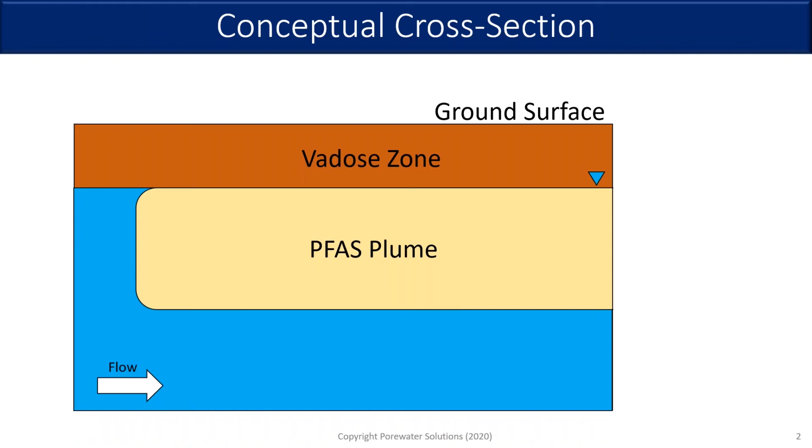I'm assuming that most people online today are very familiar with the widespread problem we have with PFAS contamination in groundwater and the real challenges we have with in-situ remediation of these PFAS plumes.

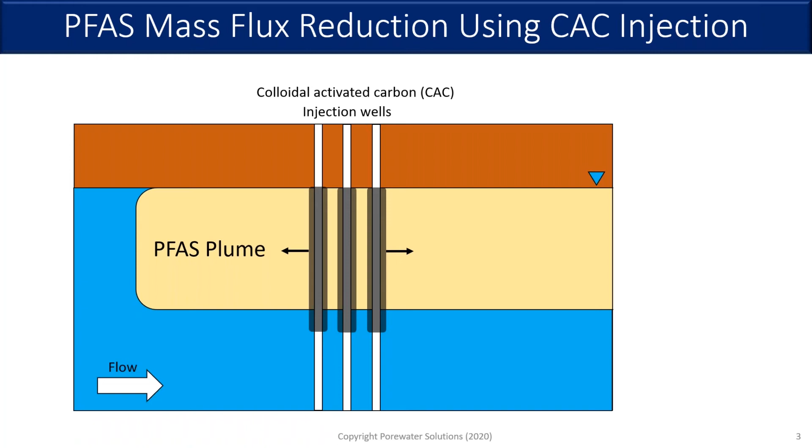One option that's gained a lot of interest these days is injecting colloidal activated carbon. These are small particles of activated carbon. Regenesis sells this as PlumeStop. We can inject this PlumeStop or CAC into aquifers through temporary injection wells, right in the PFAS plume. Over time, these little particles of activated carbon will move some distance away from the wells, not a lot of distance, but some, where they'll attach to sand and gravel grains in the porous media, and stay there. And the PFAS plume, as it moves through the CAC zone, will adsorb very strongly to the colloidal activated carbon.

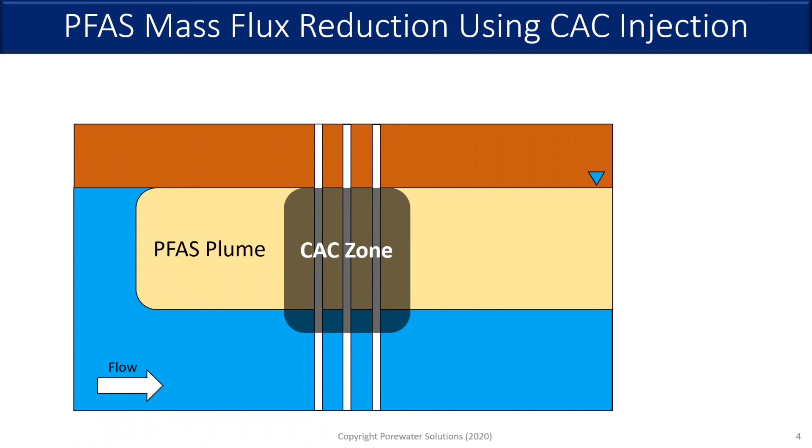So there's a real benefit for reducing mass flux from these plumes using activated carbon with solutions like PlumeStop.

Today I'm going to talk first quite briefly about some basic PFAS concepts and colloidal activated carbon concepts. Then I'm going to review a PFAS case study done at a site in Canada by Rick McGregor at In-Situ Remediation Services Limited. This is a site where PlumeStop, colloidal activated carbon, was injected into the aquifer. Very quickly, we saw that the PFAS constituents were reduced to below detection limits within a matter of months, and they've been below detection limits now for 4 years and counting. This is a site where PFOS and PFOA had maximum concentrations of up to 1 to 3 parts per billion, microgram per liter.

So one question we've had is, how long will colloidal activated carbon work at sites where we've got higher PFOS and PFOA concentrations, more in the 10 plus microgram per liter range, like we see at AFFF sites? To help with that, I'm going to walk through an example groundwater plume for PFAS constituents at an AFFF site to show typical concentrations.

We've also partnered with the University of Waterloo. Dr. Anh Pham has developed adsorption isotherms which allow us to quantify how much PFAS will adsorb to the colloidal activated carbon. We're using those adsorption isotherms to model the sensitivity of the longevity of this remedy to things like lower or higher concentrations, or lower or higher velocity. What are the site characteristics that really affect the longevity of a remedy like PlumeStop at PFAS sites?

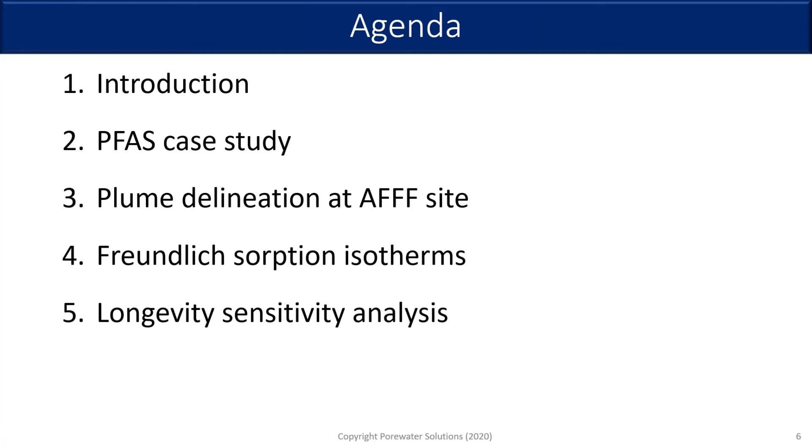So for the introduction, I'm assuming that most people here have a general understanding of PFAS. So I'm going to do us all a favor and not mention all these really long, complicated chemical names, just to shorten this presentation up.

And that's why molecules like PFAS are very difficult to degrade. They were engineered to be robust, which means they're very persistent in the environment, which is one of the challenges we have with in-situ remediation.

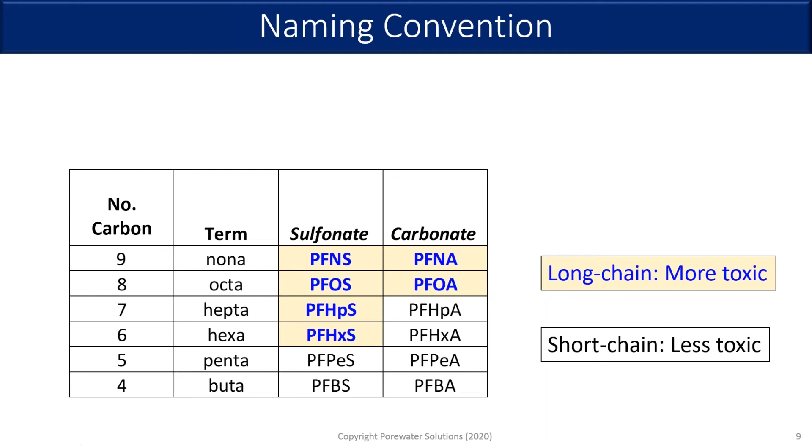If you want more information on PFAS, I'd strongly recommend you check out the new ITRC PFAS guidance manual. It's a web-based document, and you can see the website listed here. I've been on the ITRC team for about 3 years now. One thing I contributed, which I'm quite proud of, is the use of radial diagrams. This presentation isn't about radial diagrams, but if you're interested, these are very helpful because there are so many PFAS constituents we need to evaluate trends for, upgradient and downgradient along groundwater flow paths, and to see whether biodegradation is occurring.

So if you're interested, there's a tool on our website called Visual Bio. It's a free tool to download. It's a little bit cumbersome. We are coming up with a Windows version for next year, but in case you're interested, that's something you may want to check out.

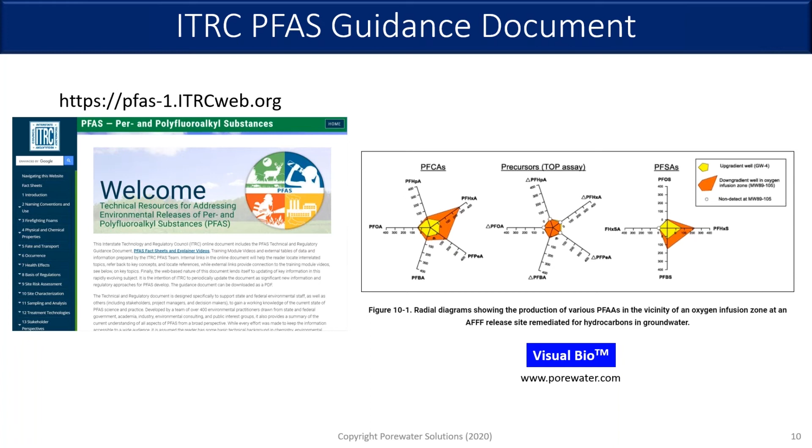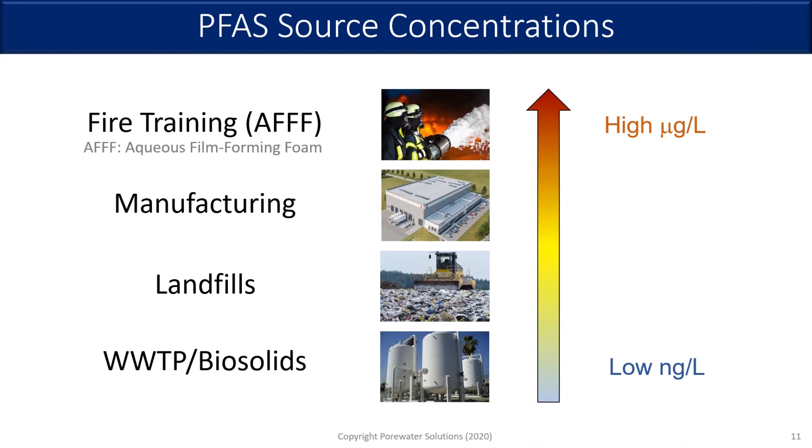With PFAS, there are different types of sites. Some sites like landfills and wastewater treatment plants have fairly low concentrations of PFAS constituents in plumes, more in the nanogram per liter range. Other sites, especially fire training sites where aqueous film forming foams were used historically, can have higher concentrations of PFAS in groundwater, in the tens to hundreds of microgram per liter range. The range of concentrations matters because the lower the concentration in a groundwater plume, the longer a colloidal activated carbon remedy will work with a PFAS plume. So at some sites, especially lower concentration plumes, longevity is fairly high. Even for higher concentration plumes, we can engineer these remedies to have higher longevity, which we'll discuss with modeling a little later.

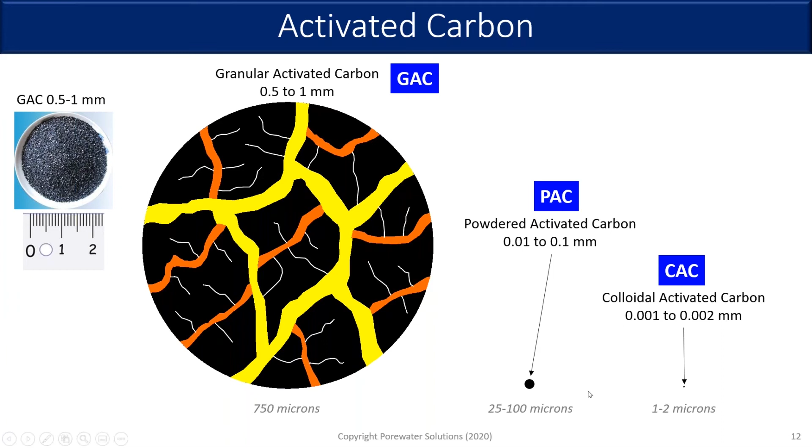They can go into finer sands quite easily, even at low pressures, so we don't have to fracture soils to get the colloidal-sized particles into the aquifer. This means we don't get preferential distribution, and they're more uniformly distributed because of their small size, which is a real advantage.

Another advantage, in addition to the small size, is that absorption strength actually increases as you decrease the size of these activated carbon particles. The yellow symbols here are from a groundbreaking paper by Xiao et al., and Dr. Chris Higgins was a co-author on this paper. They looked at how, as the activated carbon particle size decreases from left to right on this chart, the absorption strength actually increases. Based on sample data I'd received from Regenesis a few years ago, I plotted an effective KD here for colloidal activated carbon, showing it has even higher absorption strength per gram of carbon than powdered activated carbon.

So that's a second advantage. It's quite different from granular activated carbon for that reason.

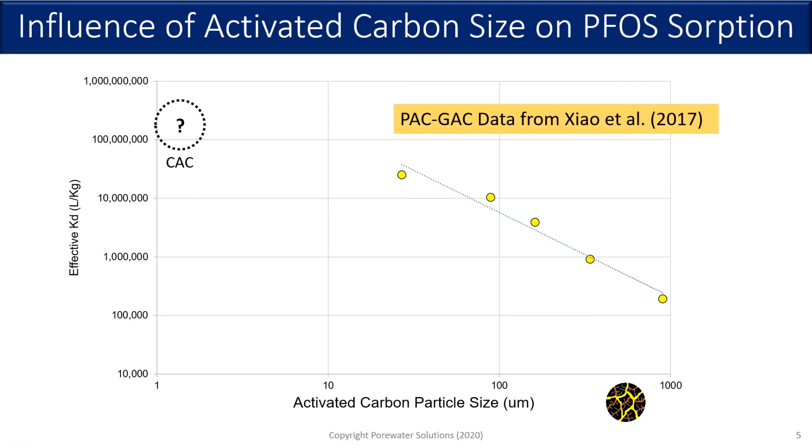In terms of applications, the photograph on the left, provided by Rick McGregor of In-Situ Remediation Services, shows what a PlumeStop slurry looks like before it's injected into the ground. It has these small, tiny particles of activated carbon, plus a polymer that helps improve distribution so it's more uniform, and the activated carbon particles don't conglomerate together. A typical radius of influence might be something like 10 feet, which is what the site in the case study I'll discuss measured.

The picture on the right is really effective for visualizing how these activated carbon particles get distributed after injection. This photograph was provided by Regenesis. You can see the large particle is one sand grain, and these small particles on the surface attached to it are the colloidal activated carbon particles, about 1 to 2 microns in size.

After injection, like any colloid—whether it's zero valent iron or emulsified oil—these particles move a little away from the injection well and eventually attach to the sand grains in the aquifer. Activated carbon is the same way, so that's what it looks like: small particles of activated carbon attached to the sand.

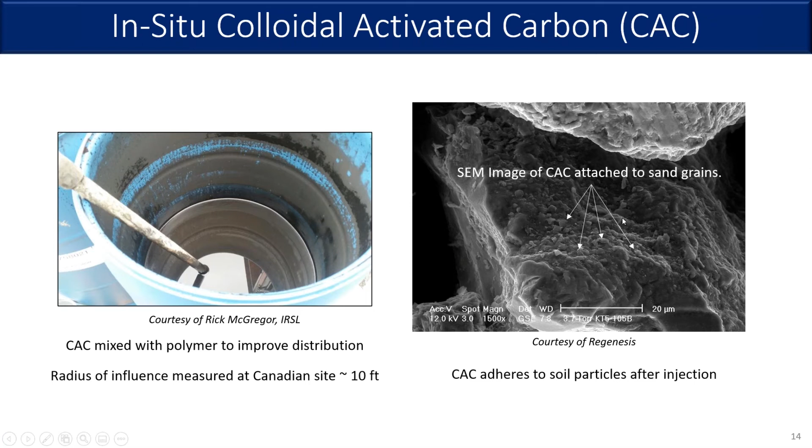Then, as PFAS or other contaminants move with groundwater flow through the porous media, they basically absorb to these carbon particles very effectively.

In terms of what a retardation coefficient looks like with activated carbon, this is a conceptual plot. Let's say we've got a groundwater plume with PFAS at maybe 10 micrograms per liter—that might fall somewhere here on the chart, before the carbon's injected. After carbon's injected, the PFAS concentration goes down substantially, usually below detection limits, so it might be here on the plot. At these really low concentrations, we've got very high retardation coefficients.

Over time, as the plume continues to move through that CAC zone, more mass comes through and the absorption sites get filled up more over time. So groundwater concentration increases a little, and the retardation coefficient declines. Eventually those absorption sites will get saturated and concentrations will return to the original groundwater levels. We'll talk a little later about things we can do to account for that with remediation at sites.

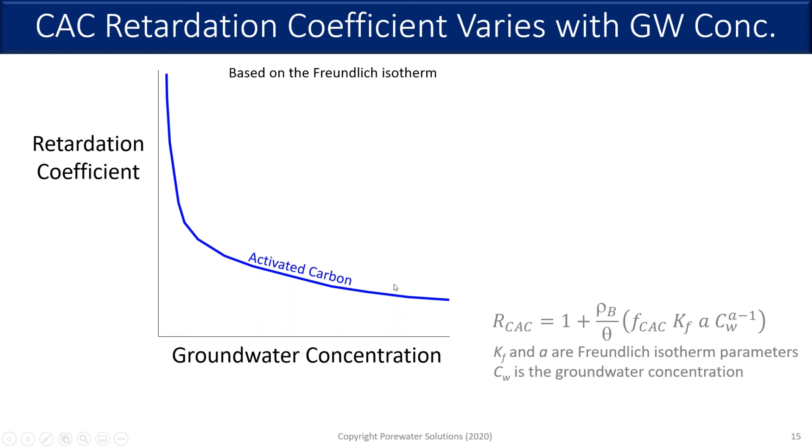Next, let's turn to a case study—I think the first site I've ever seen where PFAS were actually treated in situ. This is a site Rick McGregor worked on, actually in Canada. Rick gave a seminar for Regenesis about the site about two months ago and called it the accidental site, because it really was a petroleum hydrocarbon site. He had heard before remediation that they might have had fire training in a small area at this site, so he did an investigation and sampled for PFOS and PFOA. Sure enough, he found low-level concentrations, 1 to 3 micrograms per liter PFOS and PFOA at this site. You can see generally the source area is where that black line is delineated.

As part of this site, he injected PlumeStop, and he also injected substrate to enhance aerobic degradation of the petroleum hydrocarbons. Sure enough, the PlumeStop, the colloidal activated carbon, also completely attenuated the PFAS at this site.

So after the injection, when he went back 3 or 6 months later to do the first round of monitoring, the PFOS and PFOA were non-detect everywhere. So it was clearly quite effective for also attenuating the PFAS.

About 3 years ago, I worked with Rick. I got the data from Rick for this site and developed a model so we could simulate what happens when the CAC, the colloidal activated carbon, was injected. Around that source area, and also where there was co-located petroleum hydrocarbons, Rick had done injection of PlumeStop, colloidal activated carbon, basically around this blue area. That's the outer perimeter of where the temporary injection wells were.

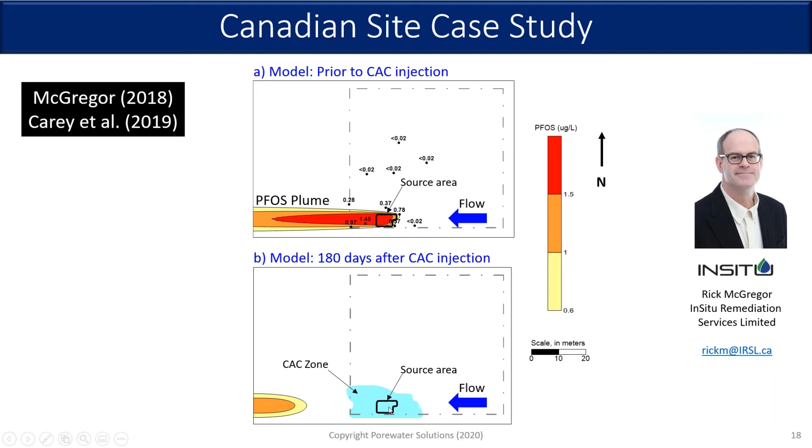So what happens is we're seeing model results here that show that 6 months after that injection, I've got a model that simulates how the PFAS basically absorbs to that carbon after it's attached to the sand grains in the aquifer. This shows 6 months after we've got plume detachment, where the source in this area is still turned on in the model, but the model shows that with the carbon injected, it's basically preferentially absorbing that PFAS and preventing it from moving down gradient. And that's where we see that plume detachment occurring.

So just using radial diagrams, just to show not just PFOS and PFOA, within about 18 months, Rick was measuring all the PFAS constituents you typically get in labs, 20 to 30 constituents. This just shows some of the sulfonates and one precursor that were measured. The white symbols here mean non-detects.

So in 2017, which is this blue data series, we had low concentrations at all the wells. There was one well that had one minor detection of PFOS at about 30 or 40 nanogram per liter. With multiple events after this one, it was never detected again. So the thinking is this may have just been cross-contamination in the field or from the lab. You can see the original pre-injection concentration for PFOS at this well was 1,000 nanogram per liter.

After the injection, it had dropped by 1.5 orders of magnitude. Looking at all the other wells in the CAC zone, we see the same thing, drops of 1.5 to 2 orders of magnitude. For PFOS, we only had PFOS before the injection, but after the injection, we didn't see any of the other constituents. 4 years in now with monitoring at the site over 4 years, we're still at non-detect levels. So clearly at the lower concentrations, PlumeStop works well because it's absorbing these PFAS and preventing it from moving down gradient.

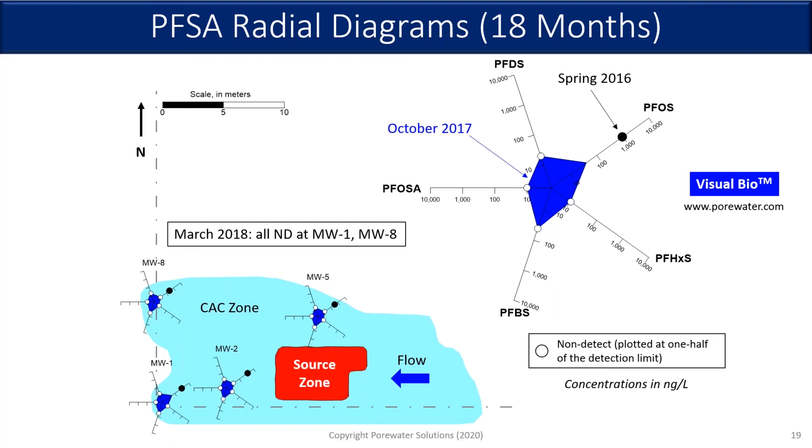Just to show what it looks like longer term, I had published a paper with Rick and other co-authors in the Remediation Journal last year. So if anybody's interested, just send me a quick email, I'm happy to send that paper to you. In that paper, I looked at simulating a longer term, using absorption parameters that were developed by Dr. Anh Pham and Seyfollah Hakimabadi.

They both worked hard in the lab to develop these isotherms that allow us to quantify longevity in the longer term. You can see in the first year, we're not seeing PFAS, it's below detection limits. After 10 years in the source area, we do have PFAS at about 0.1 microgram per liter because that source is still on in the model. I'm assuming it's back diffusion or some kind of source that's continuing the flux. So over time, those colloidal activated carbons do start - the absorption sites get filled up, the concentrations increase. It's another 3 or 4 decades before that plume is going to basically break through that CAC zone. So because we have a fairly long CAC zone here, we can see that these PFAS really get attenuated for a long period of time.

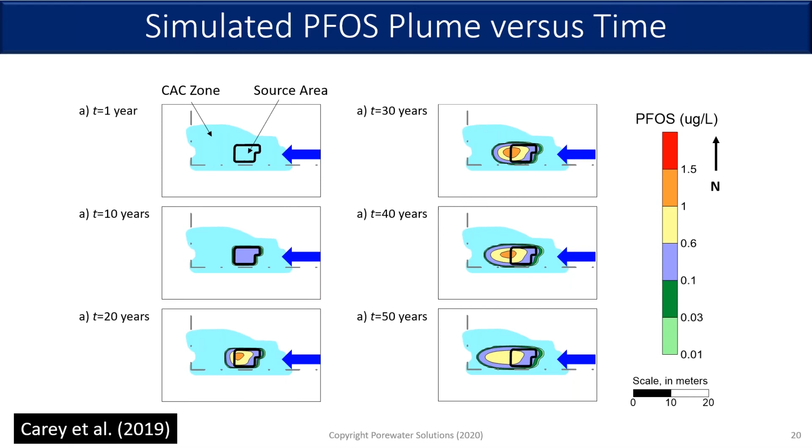So we talked about a site where PFOS and PFOA were at concentrations, maximum numbers of 1 to 3 microgram per liter, which leads to the question: how long will colloidal activated carbon or PlumeStop work at sites where PFAS are at higher concentrations, like we find at AFFF sites, where concentrations can be as high as tens to hundreds of microgram per liter?

So to help with that, I've gone into the literature. There's one site that's really well documented, and I'm going to use that as an example of a PFAS plume at an AFFF site that we'll then model a little bit later to see how longevity works with this kind of site.

So these AFFF sites, what we're really dealing with are sites with older plumes, older sources - that's the most common type of site that I've seen.

There's a great paper by Megan McGuire, who's a former grad student of Dr. Chris Higgins at Colorado School of Mines. In this paper from 2014, she went through a summary of what the groundwater plumes look like at this particular Air Force base, for data collected in 2011. She's got more information in the supporting info section and in her master's thesis.

But there's actually been more recent monitoring since, with new groundwater samples at new locations collected. So what I did is combine the data Megan collected with more recent data available online. I haven't worked on this site - these are just publicly available data that I've looked at. Putting it all together, this is what the PFAS plume looks like.

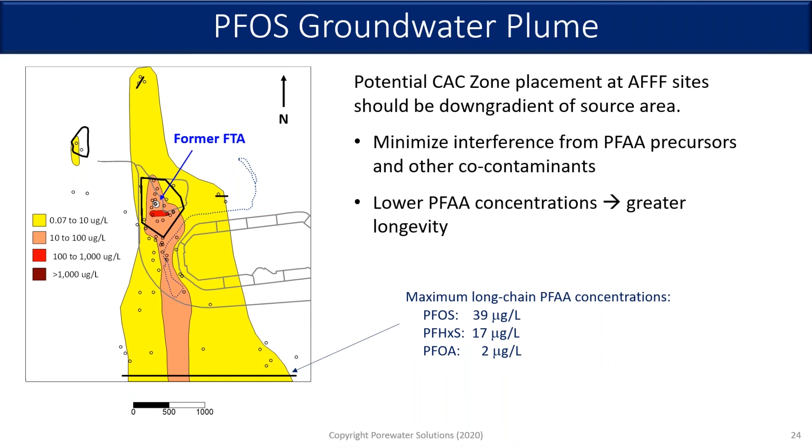One other thing to consider is that if you can decrease the mass flux or concentrations in the plume with other alternatives combined with PlumeStop - for example, if you're getting a lot of mass coming from the vadose zone down to the water table, maybe for PFHxS which doesn't absorb as much as PFOS does - if you pave over that uncovered ground surface, you can reduce the flux getting into the plume, which ultimately reduces the down gradient concentrations, giving you greater longevity for your PlumeStop remedy. So that's something to consider as a combined alternative if the cost benefit warrants that.

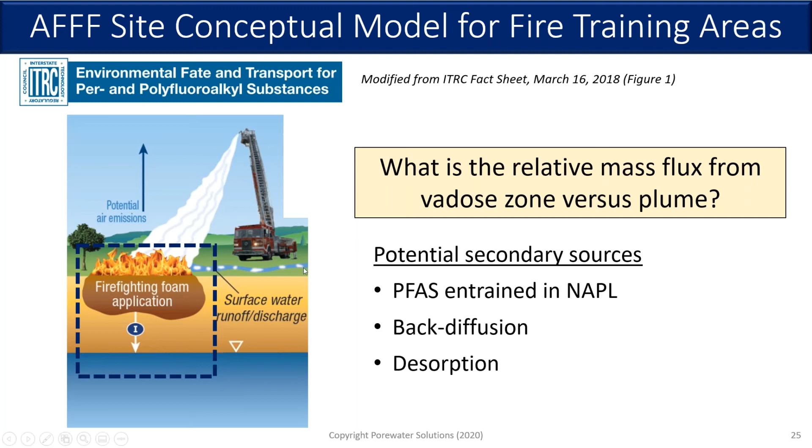Okay, so we've got the concentrations, and next we wanted to quantify what the absorption isotherms look like so we could actually model longevity. So I've worked with the University of Waterloo to do this, and to help with that, we wanted to get a groundwater sample from an AFFF site so we could get representative absorption isotherms.

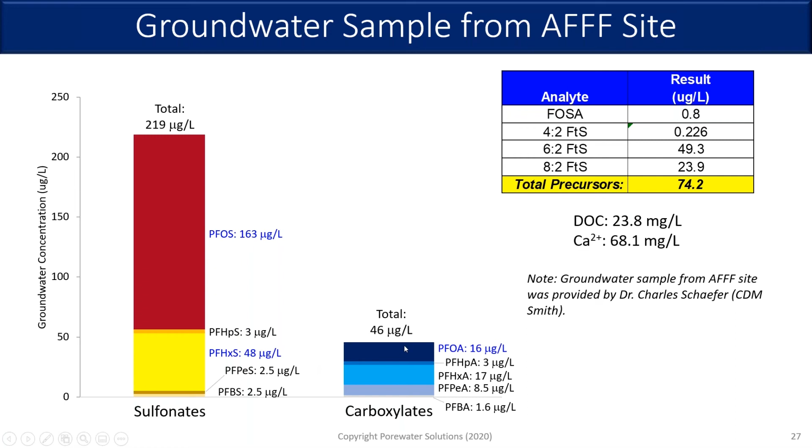Dr. Charles Schaefer provided this groundwater sample. Concentrations of this sample are actually higher than the representative plume we saw. These might be closer to a source zone. You'll see precursor concentrations are actually over 70 microgram per liter, and there's pretty high dissolved organic carbon, about 24 milligram per liter. That dissolved organic carbon and the precursors may actually interfere with absorption of our target PFAS. So these absorption isotherms may actually be conservative if we're able to go further down gradient in the plume where there's less organic carbon and less precursors.

So Dr. Anh Pham, and specifically Seyfollah Hakimabadi, a PhD candidate working with Dr. Pham, spent countless hours in the lab developing these isotherms. It's tricky working with these low concentration PFAS solutions with carbon in them. He's done a great job developing isotherms, and I've got retardation coefficients plotted here, for example, where we just have PFHXS in the water.

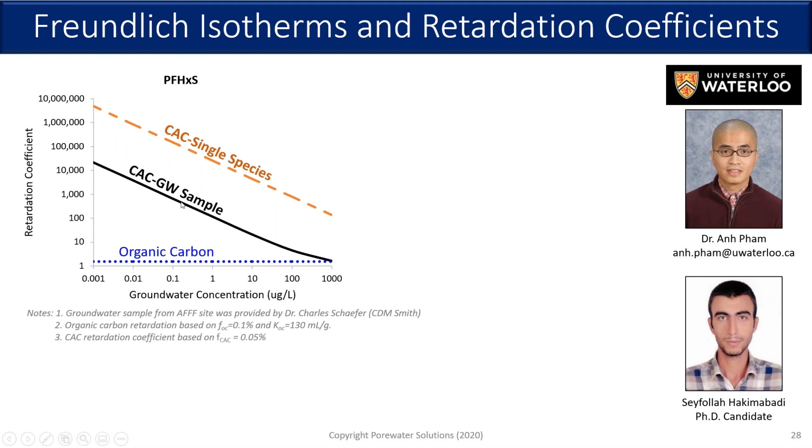That single species isotherm and retardation coefficient is about 100 times higher than what we get with a groundwater sample where we've got precursors mixed in and organic carbon. So that's showing that if you want a more representative picture of longevity, we've really got to do site-specific isotherms with groundwater samples from a site where you've got these other chemicals present, so we can look at competitive effects with these absorption isotherms.

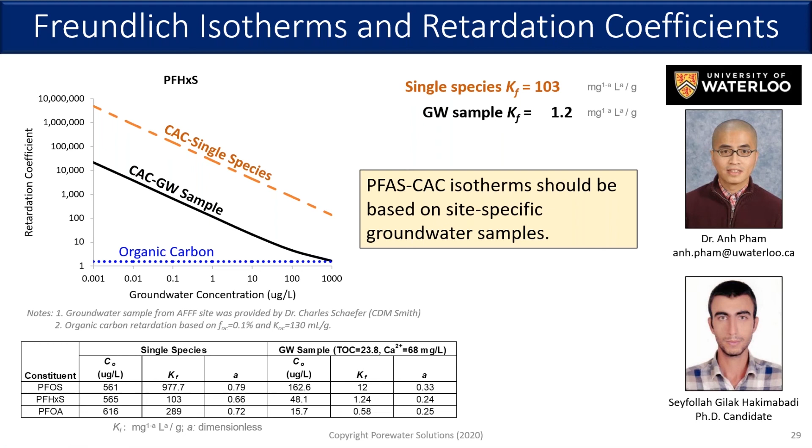So next, now that we've got the concentrations in the plume and the absorption isotherms, we've got what we need to actually model the longevity for different conditions. The base case scenario uses those plume concentrations we talked about earlier for the 3 long chain compounds most of interest at AFFF sites. I set up a simple one-dimensional model, about 1,000 feet long.

I've got a CAC zone where I simulated a fraction of colloidal activated carbon, a range of numbers here, 0.02% to 0.08%. These are numbers that Rick McGregor has measured at sites. So that gives us a measured range of what we're using in the sensitivity analysis.

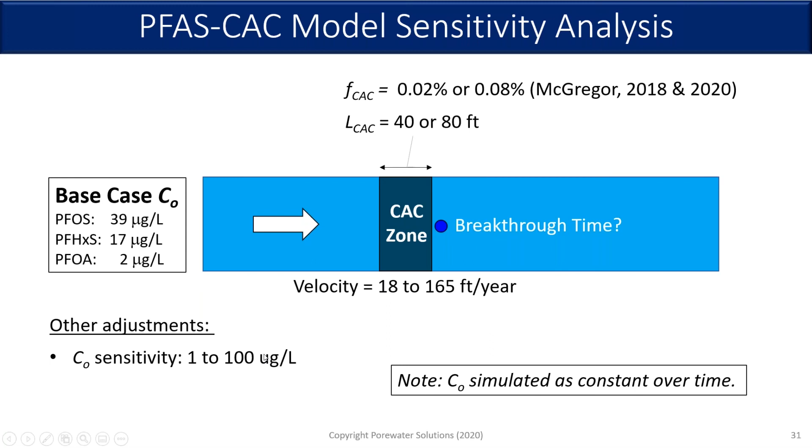I varied the length of this zone, typically 40 feet, but also modeled 80 feet to see what difference that would make in the longevity of the remedy. Velocity base case is 55 feet per year, about average for contaminated groundwater sites. The low number is that average divided by 3, and the high number is the average multiplied by 3. Then finally, I looked at a range of concentrations as well to see how those affect the longevity of the remedy.

There are some things in this transport model I've developed that allow us to do this. This is explained in that paper I talked about from last year, so if you're interested in more details, I'm happy to send you that paper.

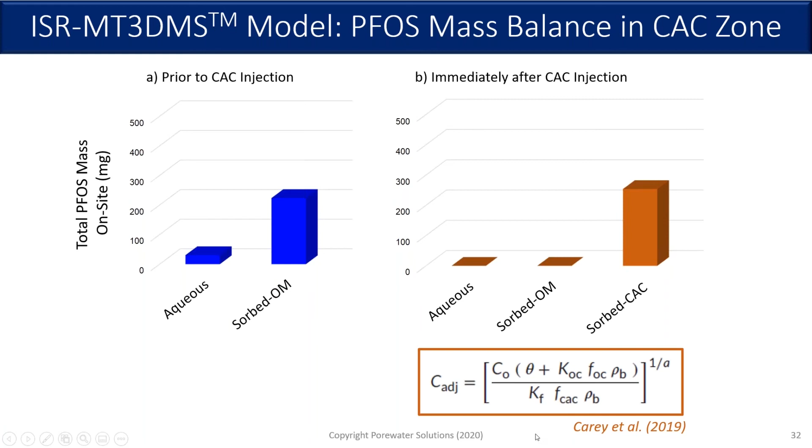I found through modeling that PFOS, even at higher concentrations, because it adsorbs more strongly to activated carbon than the other compounds, is not going to be your limiting factor for longevity. It's really the PFOA or PFHXS, depending on their plume concentrations.

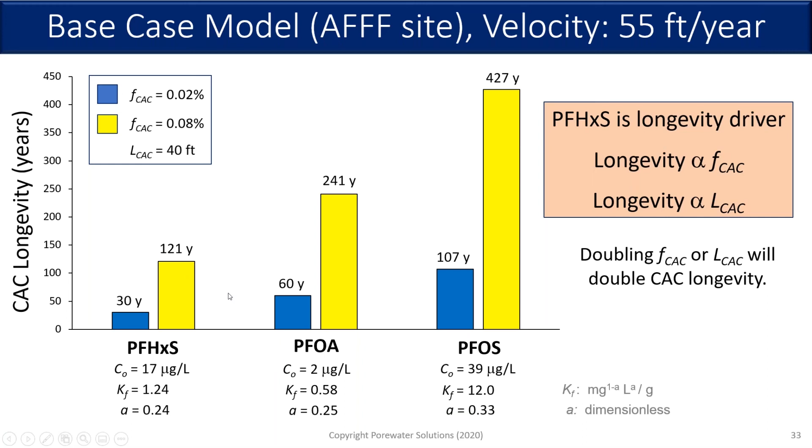In terms of velocity, it's also a fairly simple ratio. If you increase velocity by a factor of 2, you divide the longevity by a factor of 2. So they're inversely related.

So what this shows us is two things. One, if you've got sites with relatively low groundwater velocity, even with a lower fraction of colloidal activated carbon, you've still got pretty good longevity. Higher fraction of carbon, even better longevity, and velocity is less of an issue for PFAS in this particular plume we're looking at. So if you've got sites with higher velocity, you definitely want to make sure you're getting a higher fraction of colloidal activated carbon injected.

The other thing it shows us is if you have an aquifer with layers of different permeability, one layer's got a higher velocity than the other in one CAC zone, it's that higher permeability layer that's going to be limiting for your longevity if it's thick enough. If it's only 1 or 2 inches thick, and it's got low PFAS concentrations, it's really not going to be a concern for longevity. But I do recommend high resolution characterization where you're considering CAC injection.

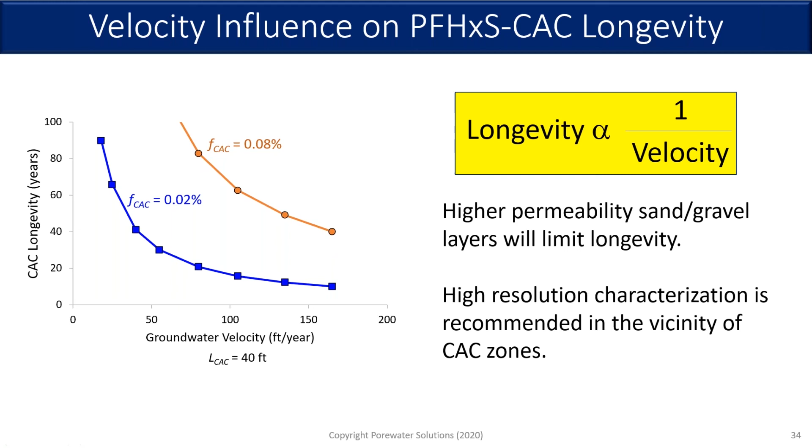I did find, though I didn't show it here, that if you increase the length of your CAC zone, say you double it, then you're doubling your longevity as well. So that's another thing we can do, even where groundwater velocity is higher for some of these compounds, if that's an issue. We can engineer the solution to try and match the conditions at your site.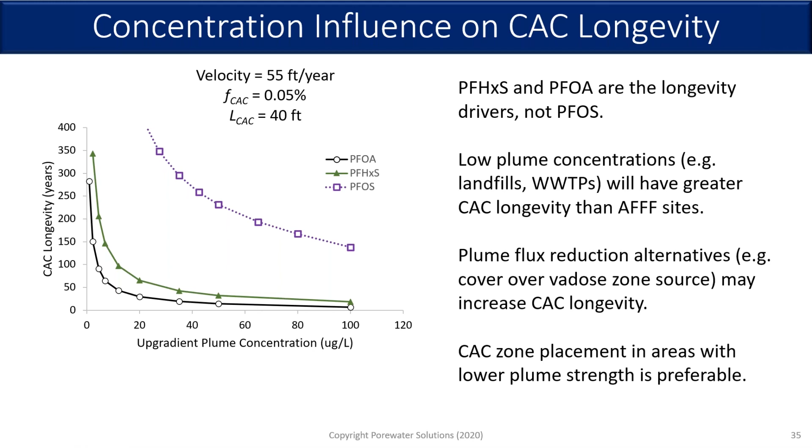With uncertainty in modeling, you have to consider where the uncertainty comes in. There are some factors we didn't include in the model that, if we had included them, would have actually increased the longevity. I won't go into the details of these, but there are factors here that make me think these isotherms are conservative. There are a couple factors that, if considered, longevity would have been decreased by some amount.

Competitive effects, we do have those in our groundwater mixture isotherms to some degree. I'm not sure what the effects are over time, I'm actually working with a couple of university teams to look at this in more detail. And then the short chain PFAS, if they are risk drivers or a regulatory concern at a site, we need to have isotherms developed to be able to predict longevity for the short chain PFAS as well.

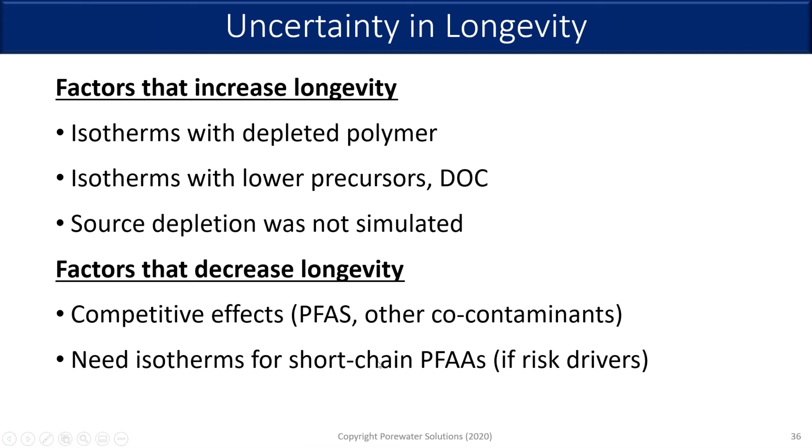So on the last slide, I just want to leave you with the fact that there are some sites where there may be a question about longevity. No question that colloidal activated carbon works. The real question is how long will it work for, and what can we do to improve longevity?

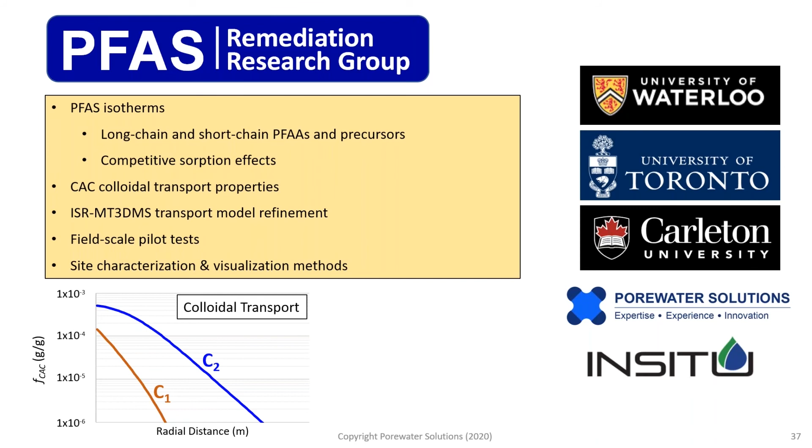Today I'm just going to supplement some information that Dr. Carey provided previously in the webinar, and go over a few things related to the colloidal activated carbon. Brief overview of the items I'm going to talk about: I'll briefly discuss the PFAS challenges we see in groundwater plumes, a bit more on PlumeStop itself, spend most of my time on considerations for using PlumeStop, and then provide an update on the Camp Grayling field case study we've been working on for the last couple of years.

So the PFAS challenges - primarily when dealing with a lot of these project sites, they're large dilute plumes that could go under multiple city municipalities, definitely multiple property owners, adjacent to multiple sensitive receptors such as surface water bodies, creeks, rivers or lakes, and even coming across into people's drinking water supply wells. For most of the projects we're looking at, we'll also have extremely low target remedial goals.

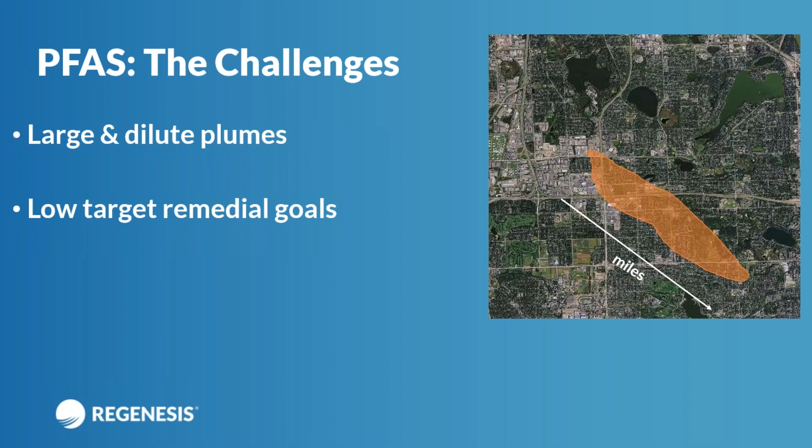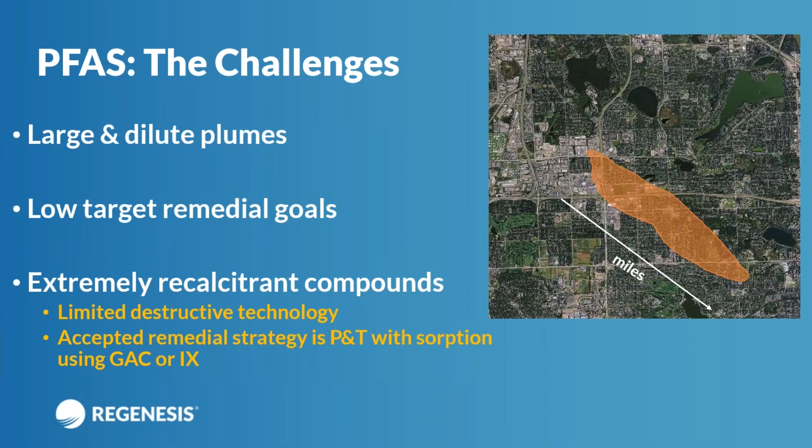Most cases are in the single digits parts per trillion, or nanograms per liter, type levels. These compounds are extremely difficult to work with. There's very limited destructive technology out there, let alone from an in-situ standpoint. The accepted remedial strategy for many of these long plumes is pump and treat with sorption using GAC or ion exchange, and pump and treat just does not line up well for these large, dilute plumes.

Dr. Carey gave a great description of colloidal activated carbon and PlumeStop, so I won't get into too much here, but I want to highlight a few things. We're talking about carbon particles the size of red blood cells, very, very small. It's suspended in a polymer solution that allows distribution under low pressure, which is very important. And as you saw, there's extremely fast sorption in relation to these PFAS plumes. In essence, we're trying to convert the aquifer into a purifying filter.

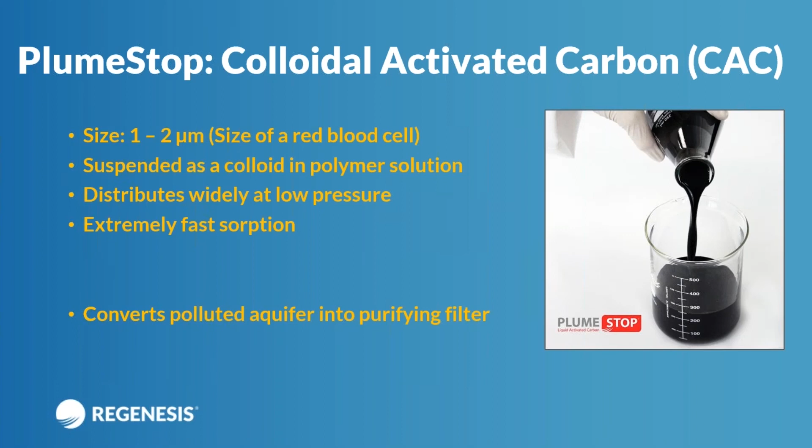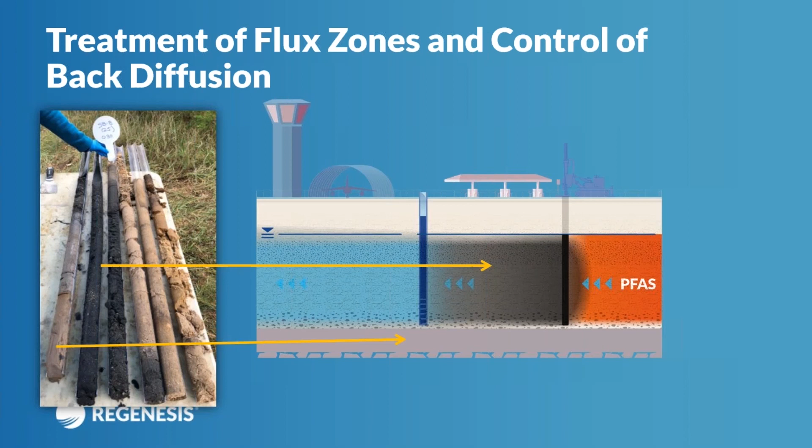How do we do that though? Not just for PFAS projects, but for any project where we're using PlumeStop, the primary goal is to coat the contaminant flux zones. By doing that, we're mitigating the migration of contaminants down gradient, and we're also preventing long-term back diffusion under the low permeable areas adjacent to the flux zones. When we do this correctly, we can protect sensitive receptors.

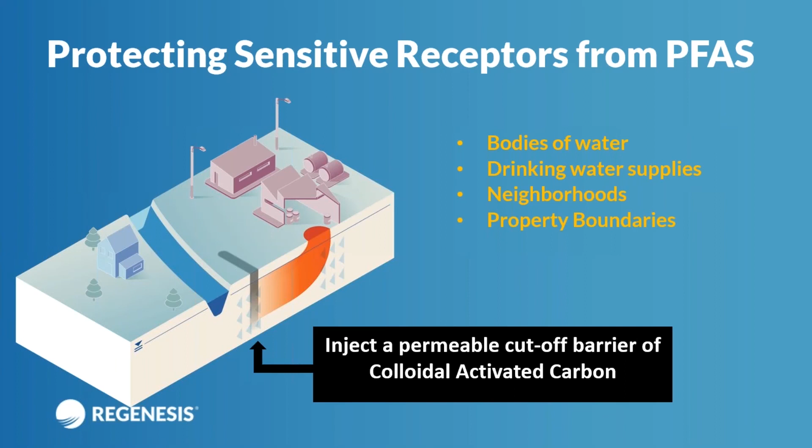This is a look at how we're doing this most often, which is installing some type of cutoff barrier, a permeable reactive barrier.

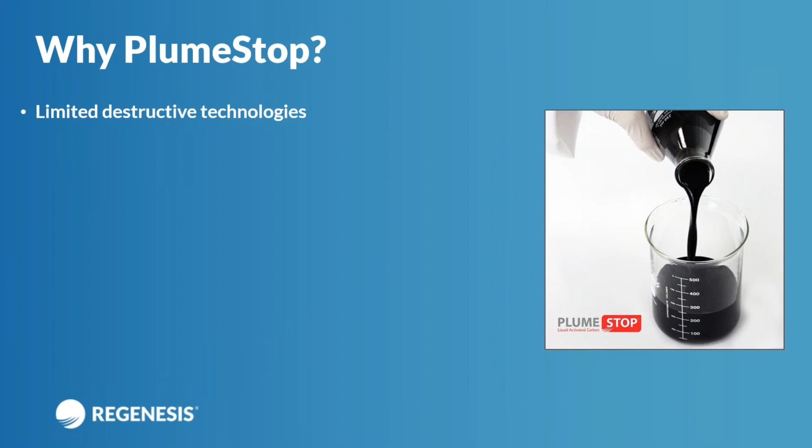So why PlumeStop? Again, I already talked about this a little, but there are limited destructive technologies. One of the big things too is low cost. This is easily deployable in the field, there's no long-term O&M costs, and we're not generating waste or something that has to be discharged and treated. Reapplication happens after many years, or in some cases decades, and it's a fraction of the cost compared to pump and treat in terms of the size of plumes we can treat.

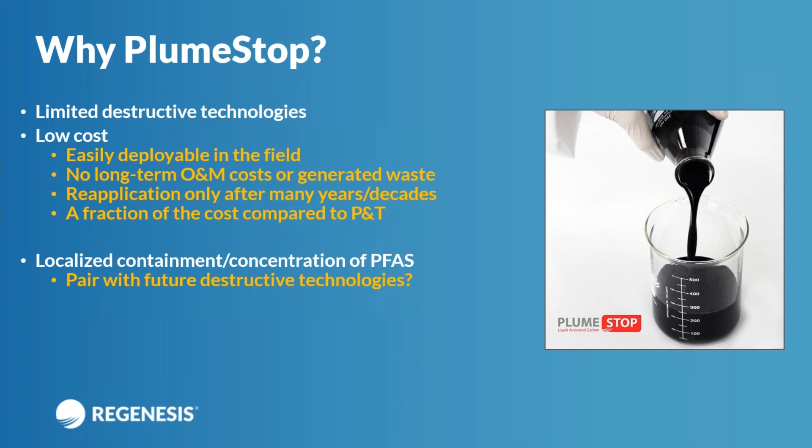We're also localizing the contaminants. We can deploy the PFAS barrier, or PlumeStop barrier, collect the PFAS over time, and then in the future that could be paired with destructive technologies to address it. The PFAS all end up in one area where you put that colloidal activated carbon barrier.

The biggest thing is we're preventing PFAS migration. We're removing the exposures and eliminating the risk.

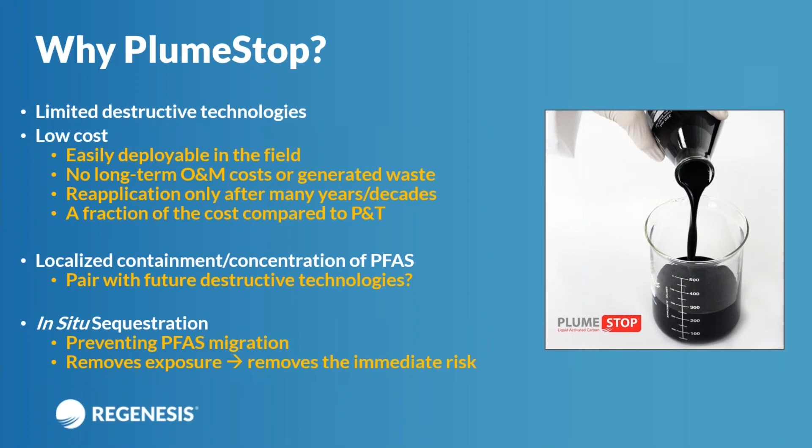So some considerations when using PlumeStop. Dr. Carey talked about this a little, but we have to understand what makes up the target compounds we're trying to address. For PFAS, a lot of times it's breaking things up between long chain and short chains, so we need a really good understanding of that. We also need to understand the groundwater velocity, or the contaminant flux, through any particular treatment zone we're targeting.

Non-target compounds are a big thing, and a lot of times this drives our dose design more than the actual target compound. So if we're trying to treat a dilute plume with, say, 10 nanograms per liter PFAS, but you've got benzene fluxing in at 1 part per billion, the benzene is probably going to drive the dosage more than the PFAS itself. We have to have a really good understanding of this - anything with an affinity to the carbon will exhibit a demand.

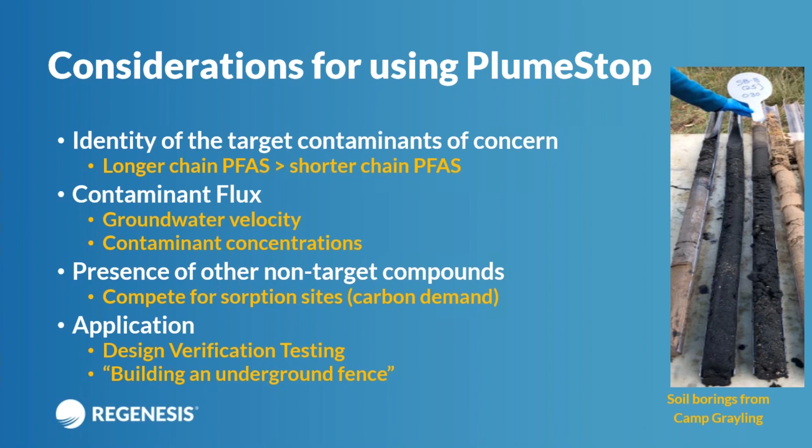From an application standpoint, we need to really understand your project site. We have a step we call design verification testing. In essence, we're trying to understand if there are any potential data gaps or holes in the site conceptual model that would prevent us from building that underground fence, so to speak.

Dr. Carey talked a lot about the modeling his team is doing. I want to give a little information here about what we do internally in our design process. We have a model we call Plume Force, which is a fate and transport model where we input different parameters and try to predict what the longevity may be, and try to optimize the dose based on site or project requirements. What I'm going to show you is just a graphical representation of the output from this model.

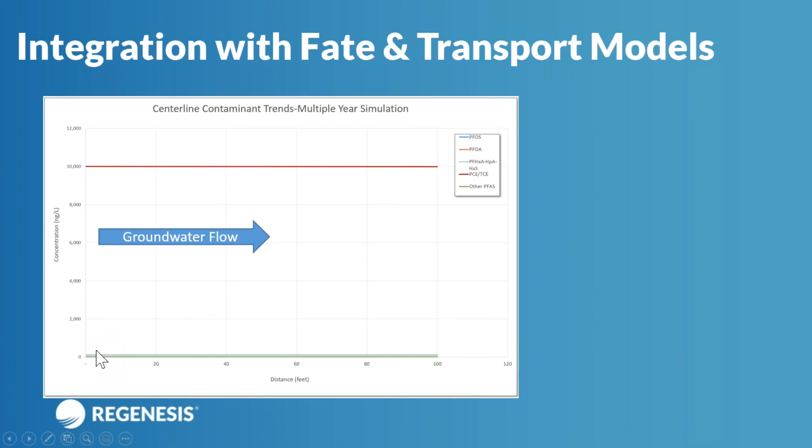From left to right, it's basically distance through the plume. You've got contamination coming in at different levels. For this graph, you have PCE at 10,000 nanograms per liter, and then some PFAS down here at the lower levels. Groundwater is moving from left to right here.

The goal of any PlumeStop barrier is to install the PlumeStop, and then have the target contaminants be pulled out of the groundwater within this barrier.

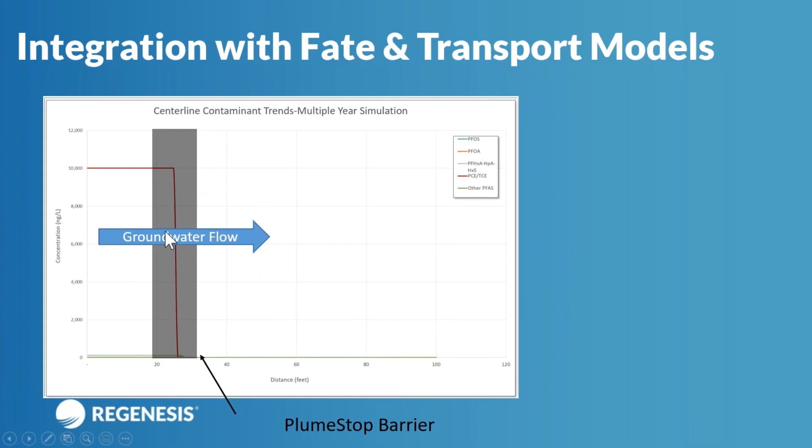A lot of the inputs we're looking at or collecting on a site-specific basis are the soil type from the treatment interval, the groundwater seepage velocity, and vertical variations. Is this a fine sand coarsening to a coarse gravel? We have to understand that. Are there clays in the mix? Not many sites are similar from top to bottom within our treatment zone.

Understanding the application in terms of where we're going to have the placement: is the barrier a single line injection? Is it multiple lines, multiple rows of injection? Is it multiple barriers? Is it more of a grid layout?

We really need to understand this, because that goes into what the longevity may be—again, the carbon demand, and then time. What are the requirements to achieve the goals for the site? Some sites might need 5 years of retention time, others might need 20 years. What does it need to be at, and how do we optimize that?

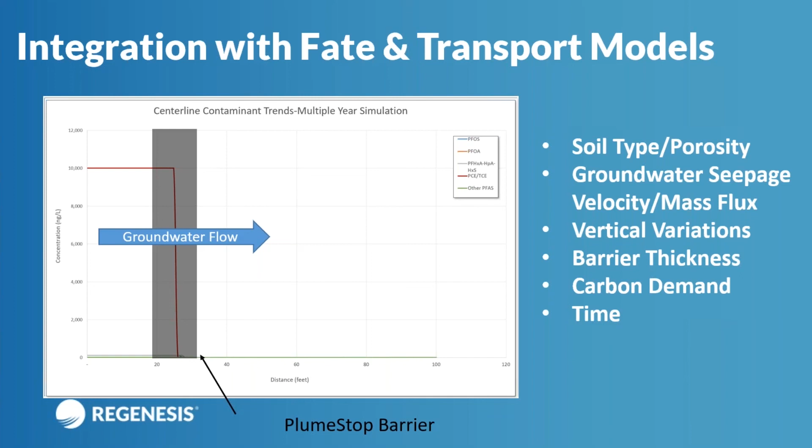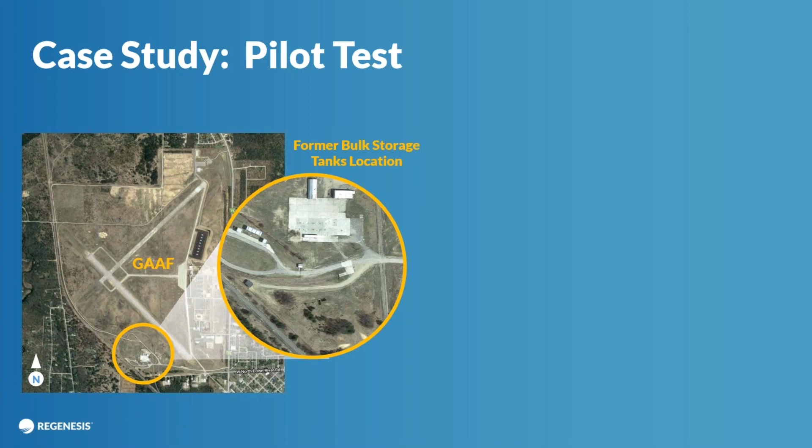The geology here is mostly sand with some gravel. There are some different clay layers with depth. Groundwater velocity was around 250 feet a year. And we were targeting for the field test the upper aquifer, the 15 to 27 feet below surface.

The contaminant levels—again, this was a commingled plume—we had PCE in the area at 10 parts per billion, and about 130 total nanograms per liter of total PFAS, consisting mostly of PFOS and PFHxS.

The reason we were looking out here is that there were multiple sensitive receptors. This was right up along the property line of the airfield. There were residential neighborhoods with drinking water supply wells nearby, and then the Au Sable River and a nearby lake as well, where they were worried about PFAS showing up into those water bodies.

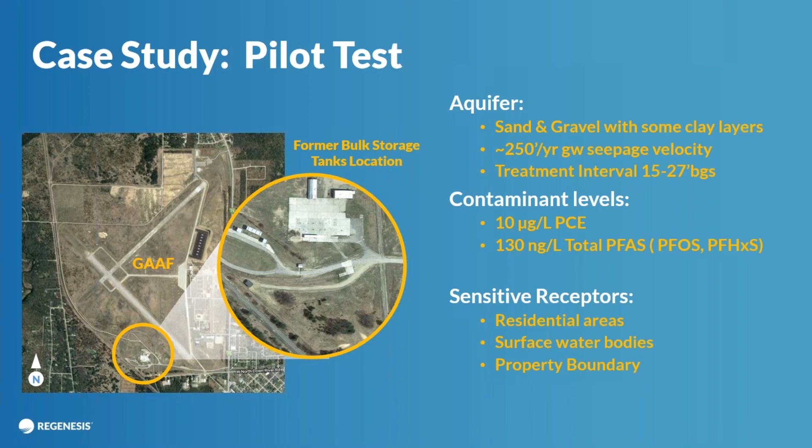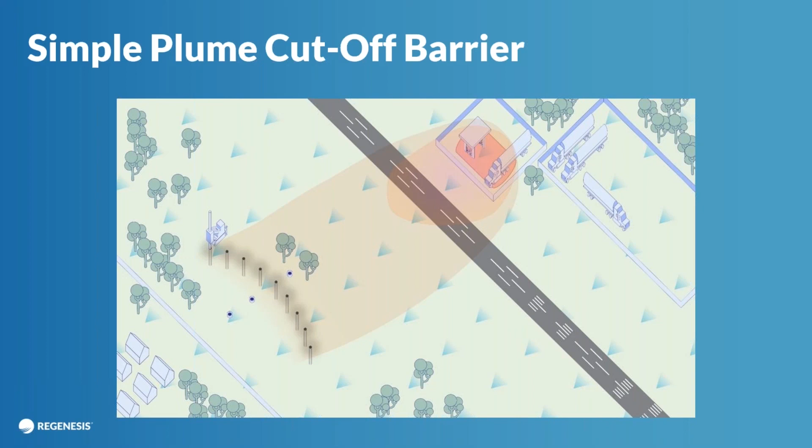So at Camp Grayling, what we wanted to do is test a simple plume cutoff barrier. This is just a cartoon illustration that shows what this is. We had one single well that we were going to apply around, and then upgradient wells and downgradient wells, and a series of injection points where we could inject the PlumeStop and then refine or optimize the approach in our injection to get uniform distribution in the field.

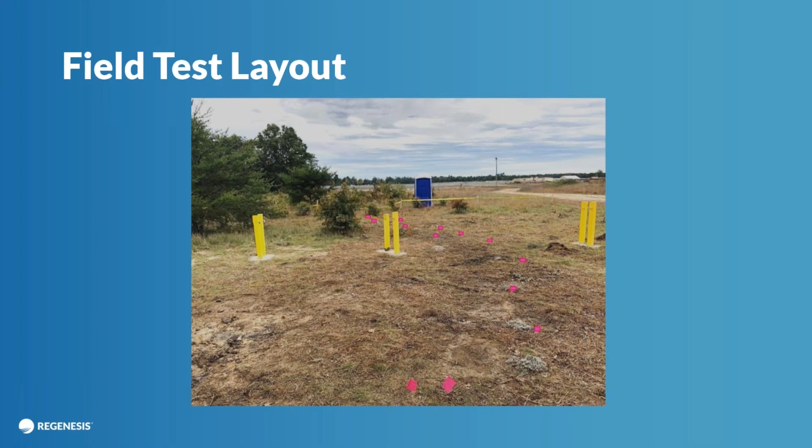This is what it looked like out at the actual site—you can see the pink flags in the arc fashion, and then the upgradient and downgradient paired wells. One note is that these wells were 5-foot screens at different intervals, so we had to understand what's fluxing in at different treatment intervals vertically.

This is kind of what it looked like. So when we go out and do one of these injections, we don't just start taking injection points and pushing it into the ground as fast as we can. We start with the edges and then work our way into the center, or maybe we start in one section and work our way around the arc.

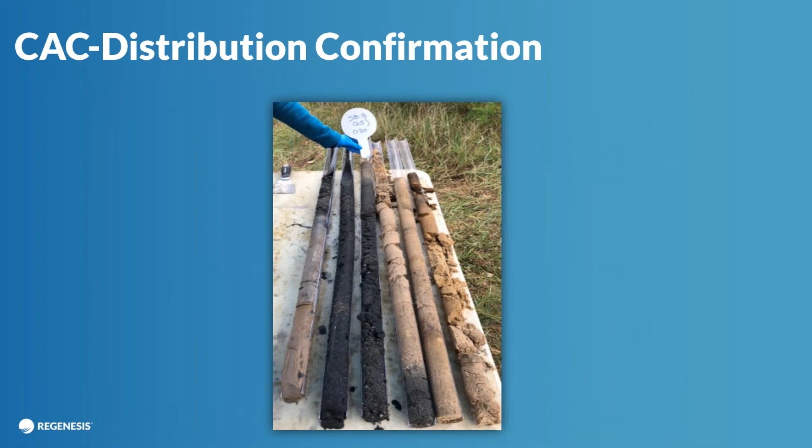And you can see at 27 feet, there's that clay layer, and then the groundwater started right there at 15 to 16 feet. And when we do these cores, it's very obvious when you have distribution. It turns the soil a black color, and that's that kind of painting effect that we have with the PlumeStop.

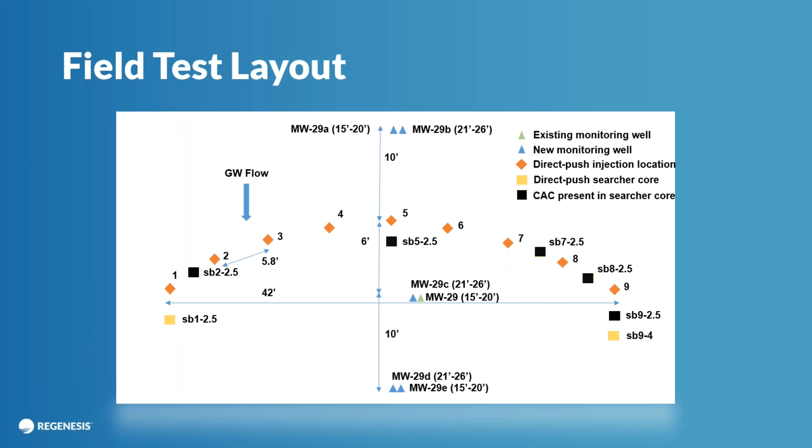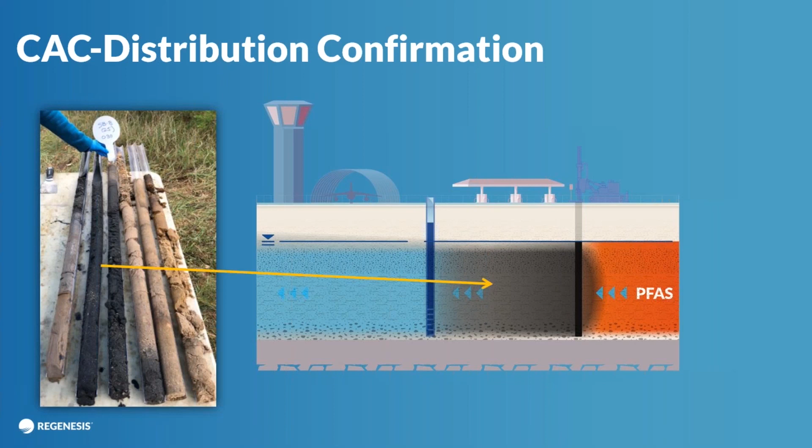And so when out in the field, looking at these, each one of the black squares, we were able to visually identify and verify that we had PlumeStop distributed through the treatment interval. So back to the original goal or intent of any PlumeStop project is, did we coat the contaminant flux zone? And as we were shown here in these cores, we did.

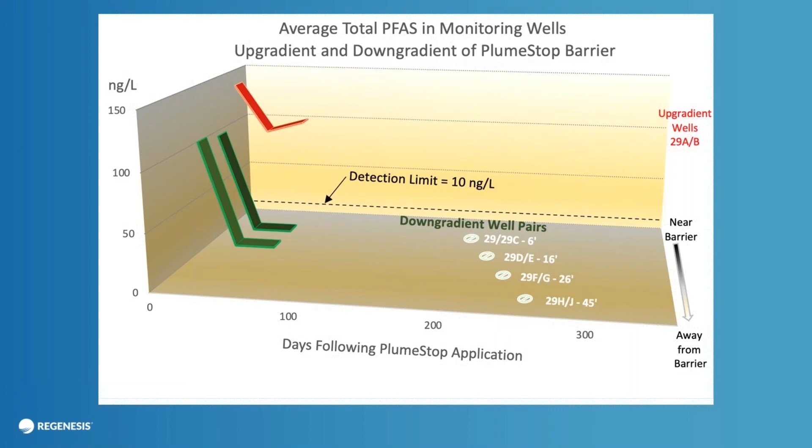And after you see 2 months here data, immediate dose response right down to non-detect. And then after about 6 months, those wells had maintained non-detect while the up gradient kind of bounced around a little bit. So we wanted to kind of maximize the benefit of this pilot test.

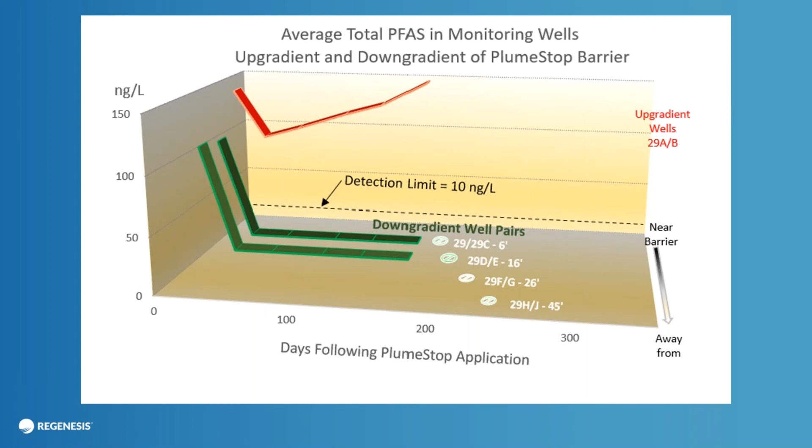We knew overall that it was going pretty much one direction, but we started this off with one well out in the middle of a field, so we're kind of refining that a little bit. And it was a good thing we did, because groundwater actually came into this pilot area at an angle.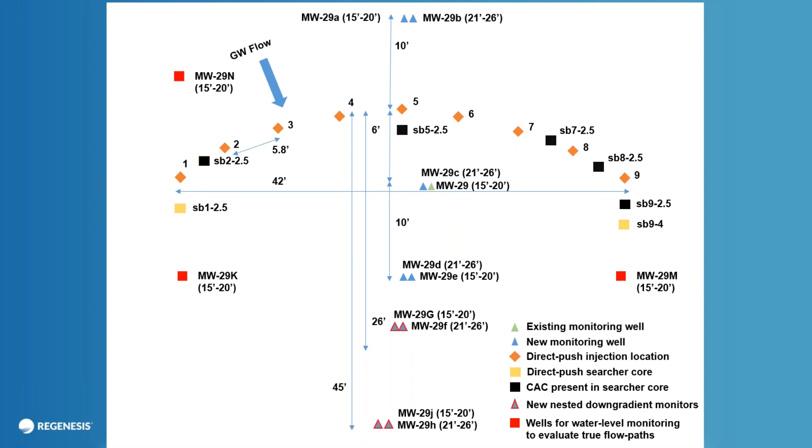So on to the continuation of the data. And so as you can see, through 600 days, all the way through 45 feet down gradient, we're non-detect, and we've been non-detect through that 600 days.

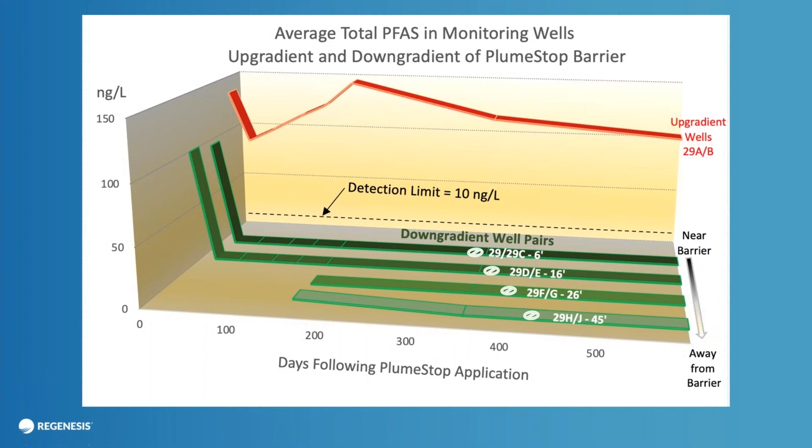When we first put in the wells that were 45 feet, we had detections that were near or slightly above the detection limit, but since then, as additional sampling has occurred, everything's been maintained non-detect down gradient of the application area. I did mention that this was a commingled PCE plume.

But as we've continued to sample, that has too come down, and that kind of matches up with our prediction on the models that as you move away from the barrier, it just takes longer to see or realize those same reductions.

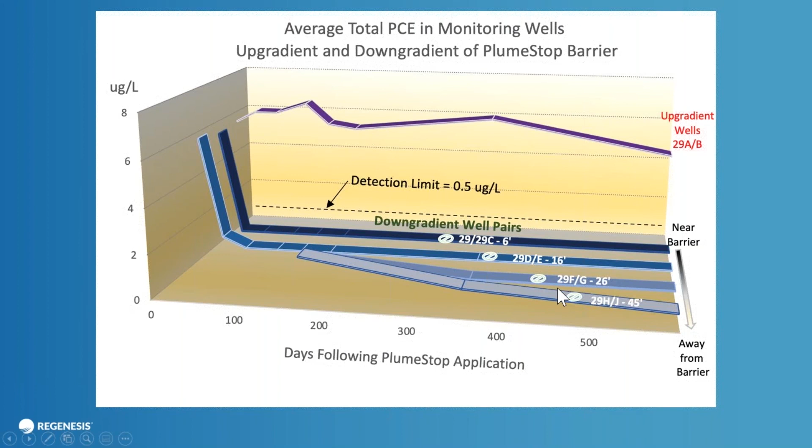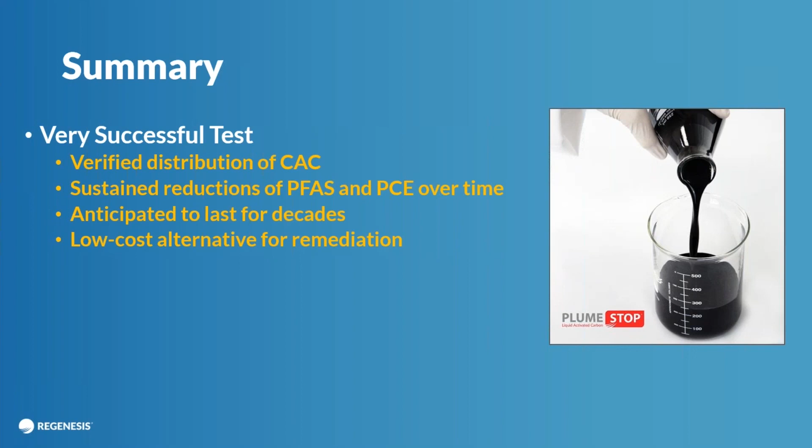So in summary, this has been a very successful test. We're able to verify distribution of the colloidal activated carbon. We sustain reductions of both the PFAS and PCE over time. It's anticipated to last for decades. And this is a very low cost alternative to pump and treat.

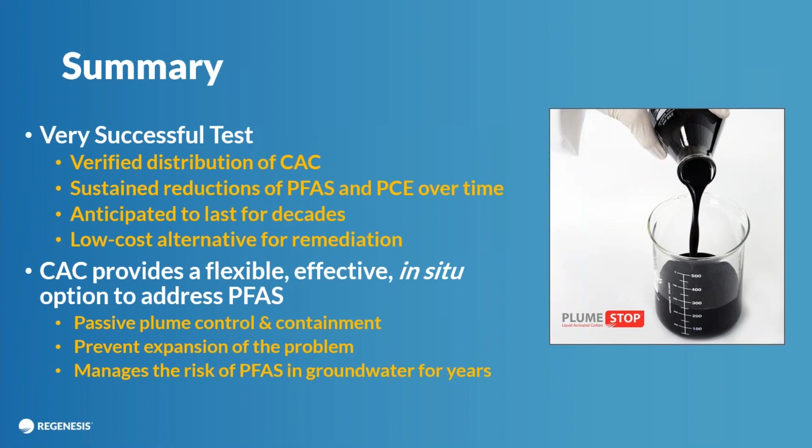And so bottom line is that colloidal activated carbon provides a flexible, effective in-situ option to address PFAS. We prevent expansion of the problem, and we're managing the risk of PFAS for years to come. With that, I want to thank you, and we'll open it up for questions.